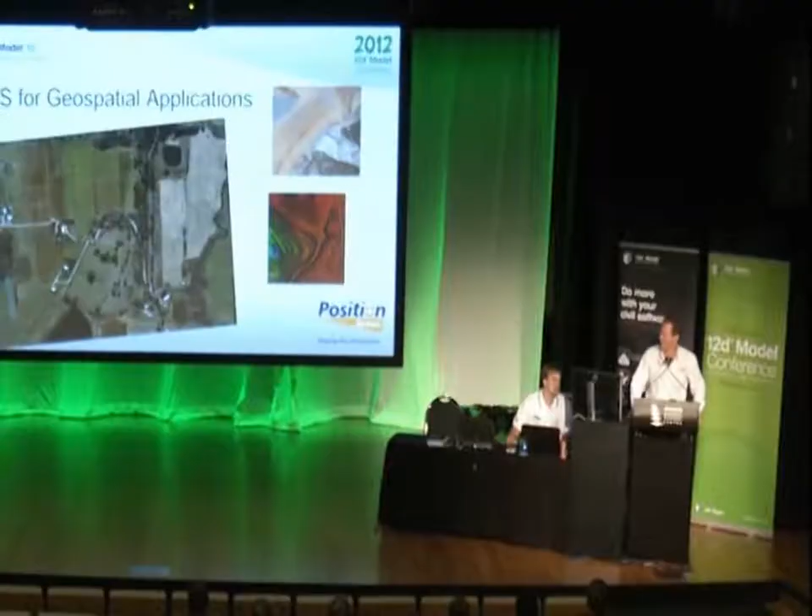Thanks very much, Lee. Great to be here today. Look, UAVs excite me, so if I get a little bit excited, please try and calm me down a little bit. But I'm a bit more excited about our guest speaker later. He sounds fantastic, so I don't think these little UAVs will be quite as exciting as that. But anyway, let's see how we go.

So UAS or UAVs, essentially they're for lots of different geospatial applications. We've got a few pictures up there of different applications. So in farming, we also use them in mining or in quarries, and they can also be used in some civil type areas.

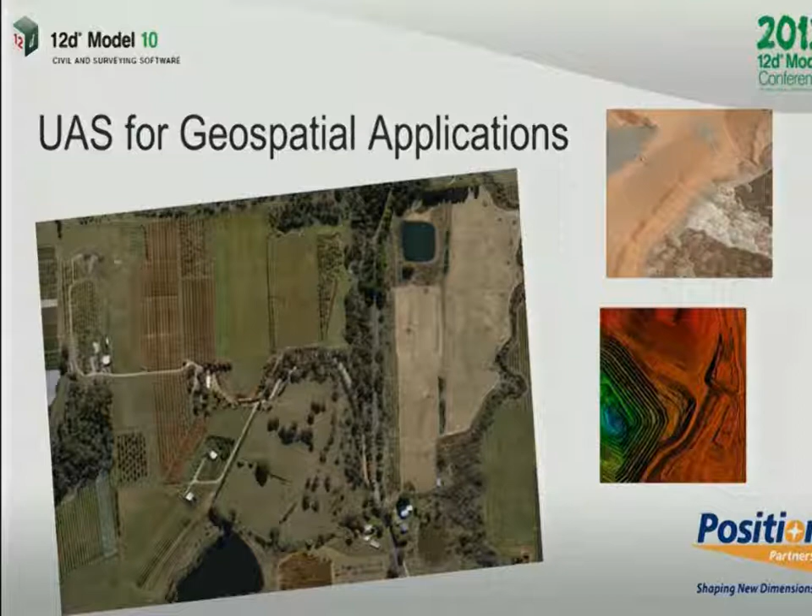So a little bit about the session. About Position Partners, about UASs, a little description on what they actually are. Also the market drivers, why are we starting to use these? Geospatial applications. I showed a few photos there, but I'll go into a little bit more depth. The value, why would you use it? And also a couple of case studies on where we've actually used these.

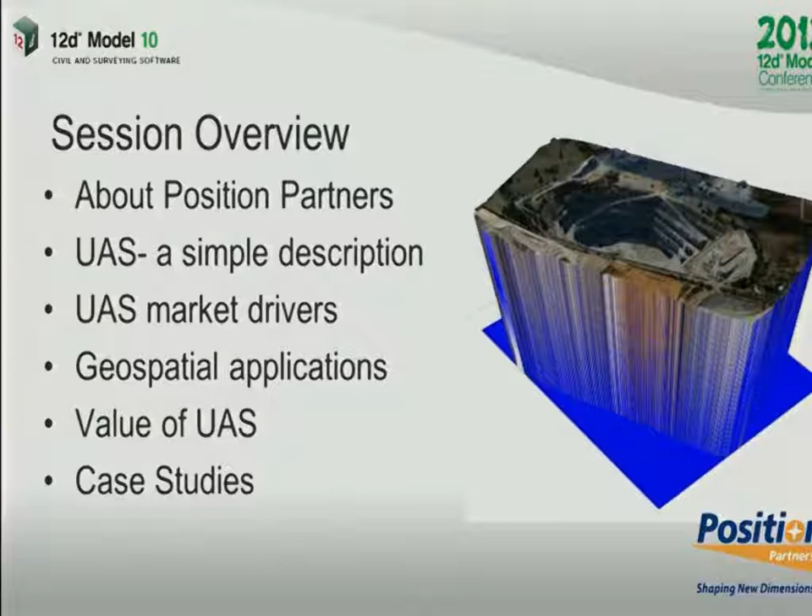So a little bit about Position Partners. Who are we? Well, we like to consider ourselves as Australia's premier provider of positioning and machine control solutions for land management, civil works, and building activities. In 2008, Position Partners was established. It was a result of our customers asking for national support and national service. So we're a bunch of individual companies which actually came together.

So now we're a nationally structured team. We have technical sales representatives, we have people on the executive side, and we also have support and administration people. The idea is for us to be a national company, but also to support on a local level.

With this joining together into one large company, we looked at other ways in which we could grow our business. And all businesses, if we don't grow them, we go backwards. So the idea was to bring on some new initiatives. And one of the ones we saw was these UASs or UAVs. We realised that this is something that Australia needs to capture. So we took it on.

We employed someone who actually has a pilot's degree. He has his licence, and he has been working with us and looking at all the different options that are out there. So throughout the time that we've taken them on, we've seen lots of changes.

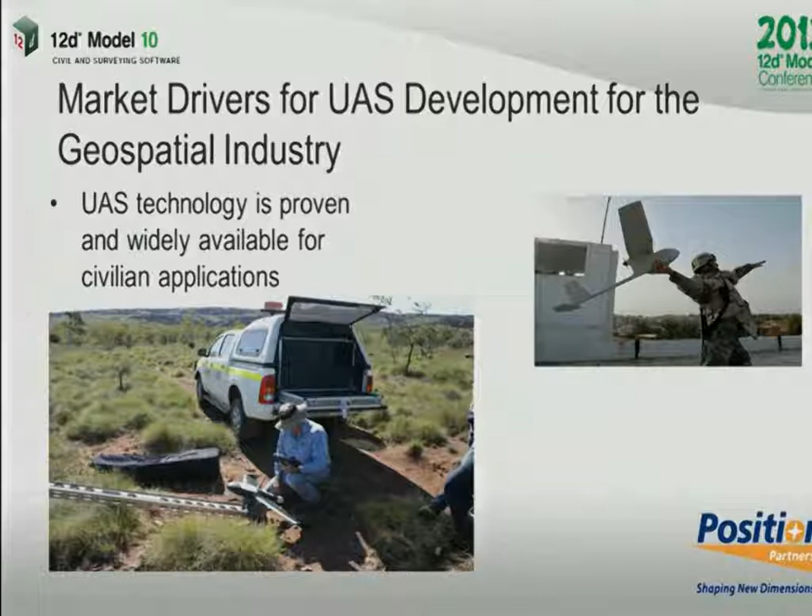Now, this technology has been proven in the military, so the military has said, okay, this is good, and we now are starting to use it in civilian applications. You'll see a couple of little pictures there of someone utilising a UAV for civilian use and someone using it in the military. And they're both very, very different UASs.

Another thing that's changing in Australia is the regulations that CASA have. There were very restrictive regulations a few years ago. At the moment, they're spending time rewriting these regulations so that there is airspace up there for us to be able to use these for our aerial surveys.

Now, there's been a proliferation of these units. There's lots of different types, and they work differently. And it's like a hammer. There's a different tool or a different hammer for every job. You don't use a sledgehammer to hammer a nail in.

So when you look at the different UASs, you can look across the market. You can say, okay, well, there's one that's great for that small job, for that quarry that's close to the houses, or there's one that's fantastic for that large mine site out in the middle of nowhere.

Also, it might be a windy day. What do we use on a windy day? That small unit we have gets blown about and our results are no good. So you really need a couple of different units to be able to cover the spectrum of the jobs that are happening out there in the marketplace.

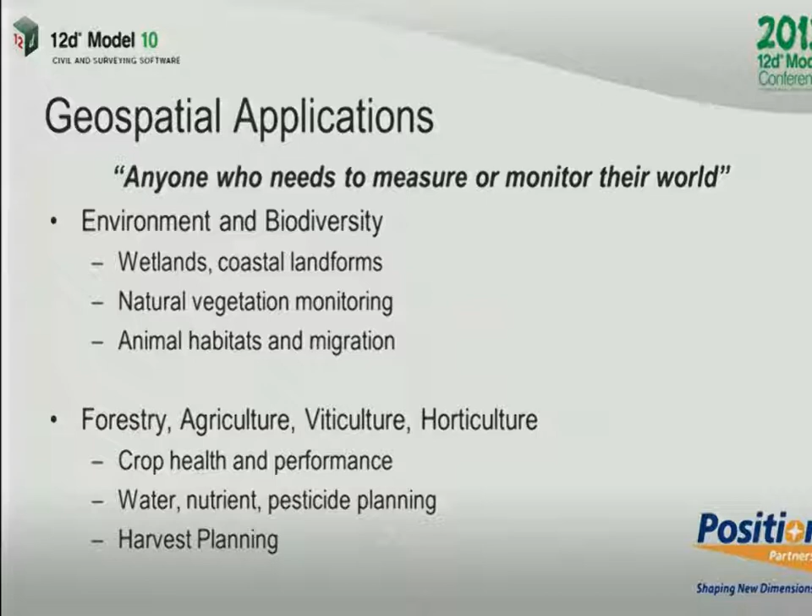Your emergency services, your natural disaster response, your accident, your incident, your crime scenes, fire monitoring, defence and customs, and being able to target certain areas, doing terrain intelligence and surveillance. And research, things like archaeology, heritage and geology.

So why use this type of technology? Well, it's more affordable than normal manned surveys. Those manned surveys, those planes cost a lot of money to put up. One of the other things that I haven't mentioned here is on a cloudy day, those high surveys, you generally can't fly them. But because you fly below the clouds most of the time, these actually work.

On site, having this equipment in your toolkit means that you can actually deploy them when you want to. So you can get information at different stages throughout the job instead of waiting for the right day and having a flyover. It's much more cost effective.

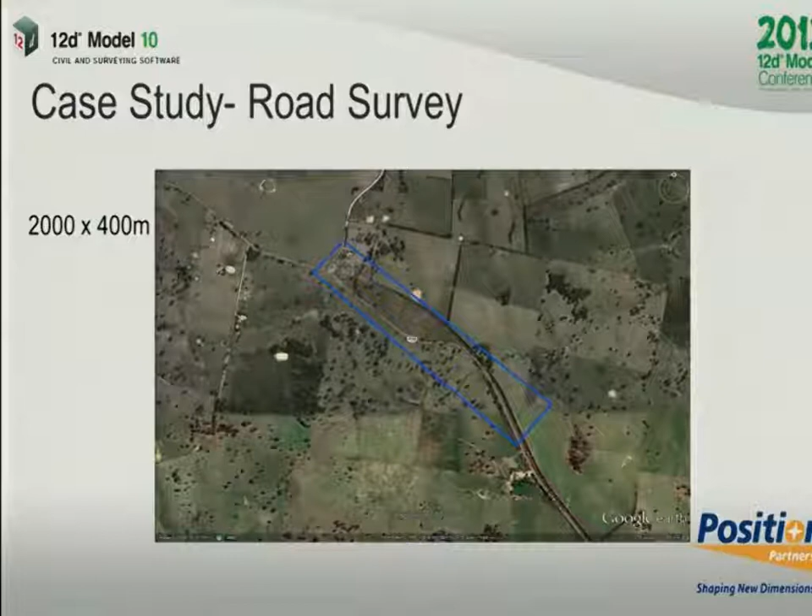So just a couple of case studies. So a couple of times we've used these units in real-time jobs, and this was actually a road that was in New South Wales. So the area that we wanted to fly over was 2 kilometres by 400 metres. There was control, so there were 6 control points within this area, and it was a road reserve.

The day had some broken cloud. There were 25 kilometre-an-hour winds, and we actually took 495 photos, and it took us 30 minutes to fly it. So the time up there wasn't a lot.

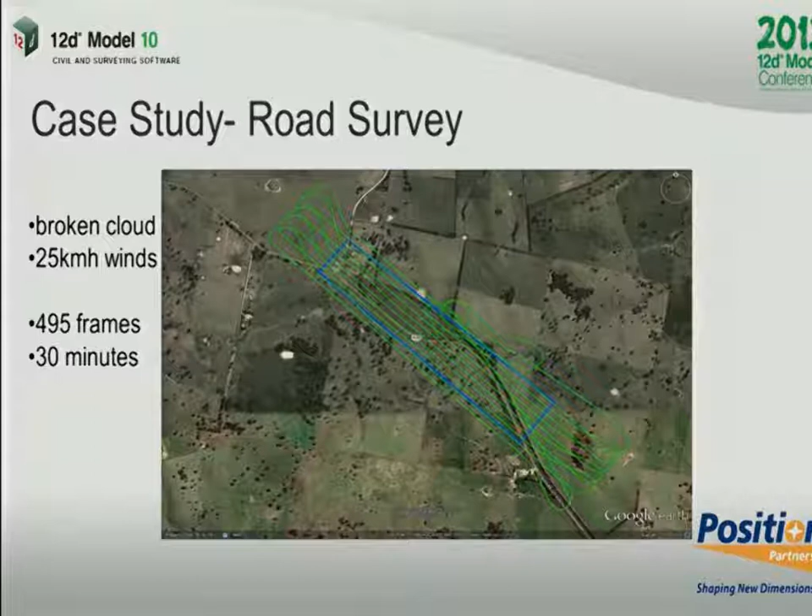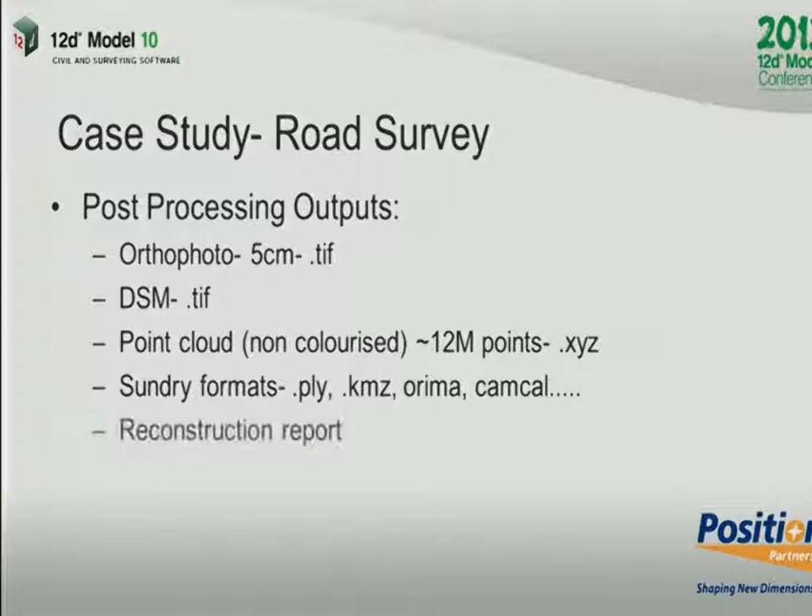So from this, we actually got a whole heap of photos, ortho photos, at 5 centimetres. We also got DSM. We also got point cloud, which was non-colorised, of 12 million points. And we also had a whole other heap of formats that we got out of this particular processing. And we also got a reconstruction report, which I'll show you.

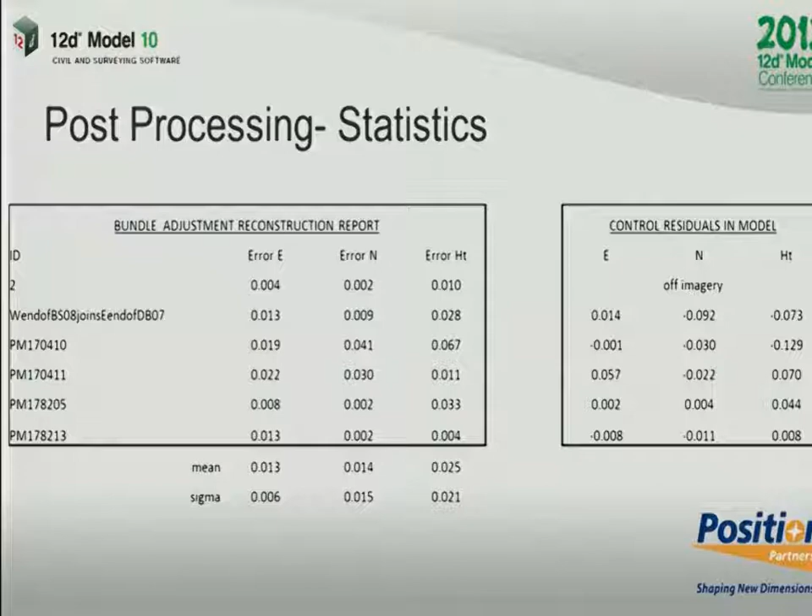So on the reconstruction report, we ended up with our bundle adjustment here, and you can see there's a number of different errors. So errors in your easting, your northing, and your height. So when we put them all together and we work out our mean, you'll see that there wasn't a lot of difference. Also, when we actually go and overlay our imagery, you'll see here, these are our differences.

Now, one of our control points, of which we had 6, was actually outside the road reserve. So it was outside of the image that we actually picked up. So that's why you won't see any residuals there.

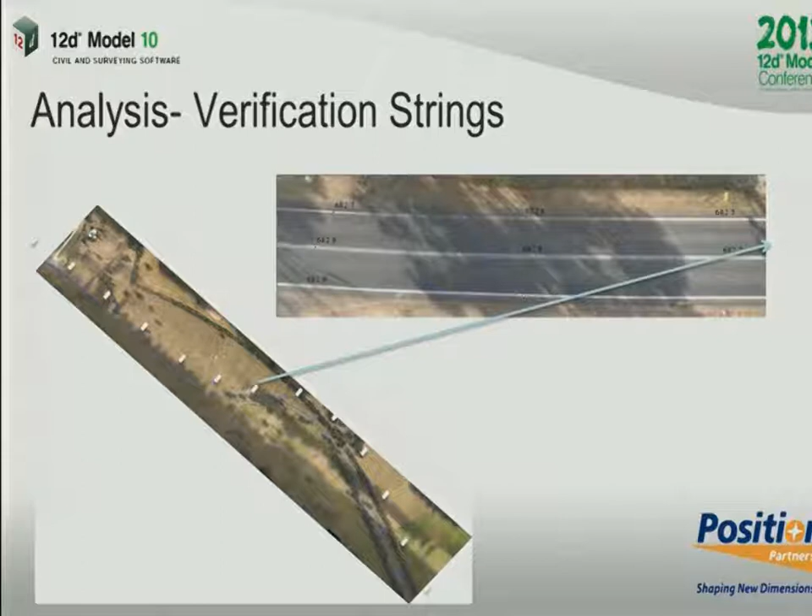So when we then go and analyse our strings that we had across the road, this road reserve had actually already been surveyed, and so we're just having a look at the difference between the survey we'd done conventionally and a survey that was done aerially. So we actually had 13 strings across the road. And if you have a look at those 13 strings, there was an average difference of 0.047 of a metre.

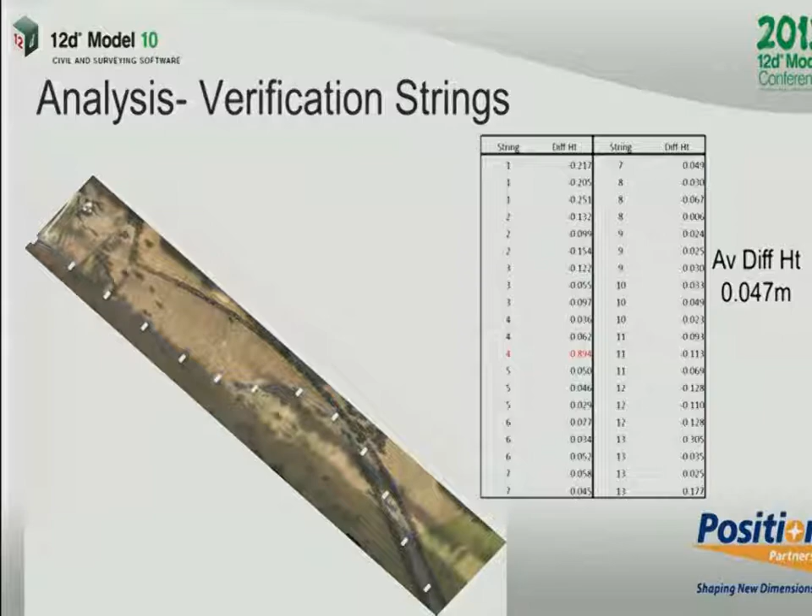Now, if we actually drill down into the data and have a look, the 4th string was pretty bad accuracy. So we can't just look at that and say, hey, why is it so bad? We drill down, we have a look and say, okay, well, the reason it's bad is if we look closely at it, there was actually a tree overhanging it. And when the tree was overhanging it, it was obviously picking that up.

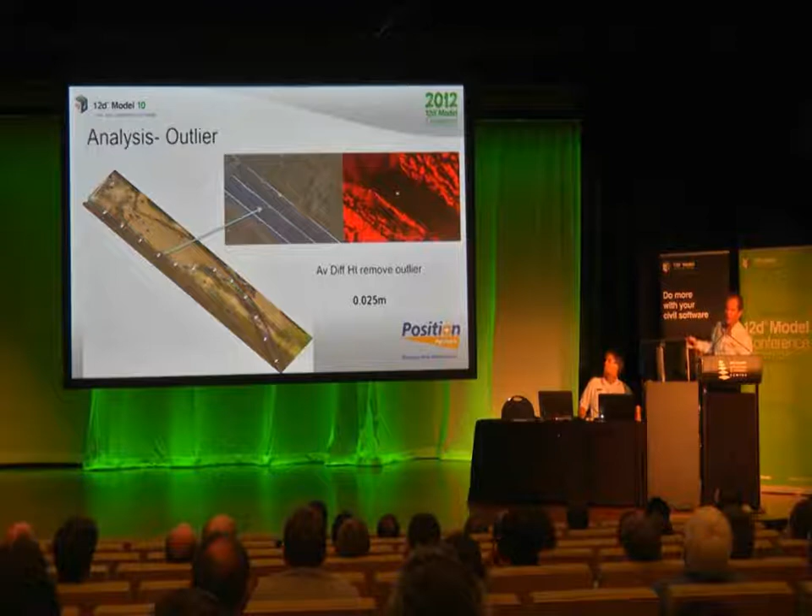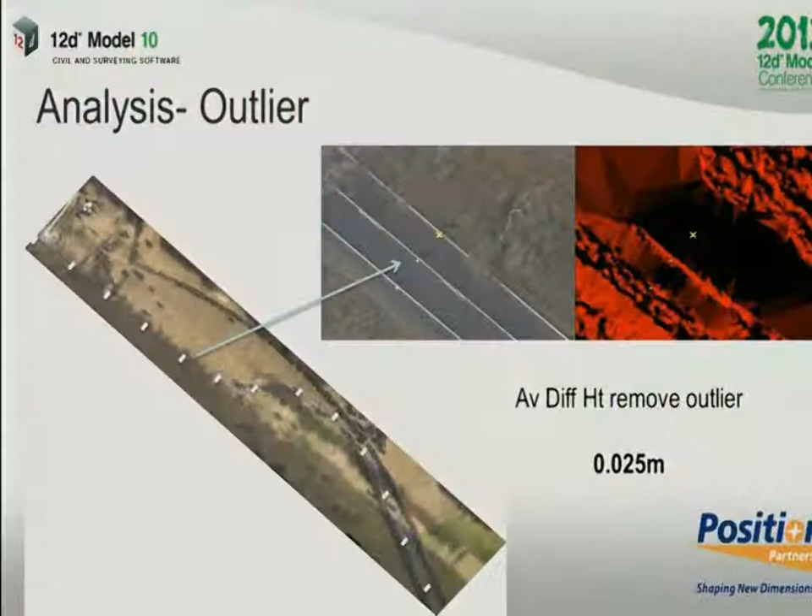So there was 800 mil there of error. And then we could ascertain that that was the issue. So once we then removed that as being an issue, we got it down to 0.025 of a metre. So nice tight accuracy for a quick flyover.

So people say, okay, well, it's half an hour in flyover. What were the other times? So your project planning in the office was half an hour. We're looking at establishing and marking our control of an hour. Our pre-flight was half an hour. Our flight was half an hour.

Our post-flight was 25 minutes. Our post-processing that was manned was 25 minutes. Our post-processing that was just done purely by the machine, where we weren't there anymore, it was just crunching away, was 4 hours. So there was a total of 7 hours, but of that there were only 3 person hours involved in this. So quite quick for the type of result that we got.

So just a little summary for the road survey. Look, it is less accurate than RTK or a total station, but it's a low-cost, rapid way of picking up your data and processing it. And as you can see there, when we actually removed our outliers, we were able to get the difference down to be quite tight.

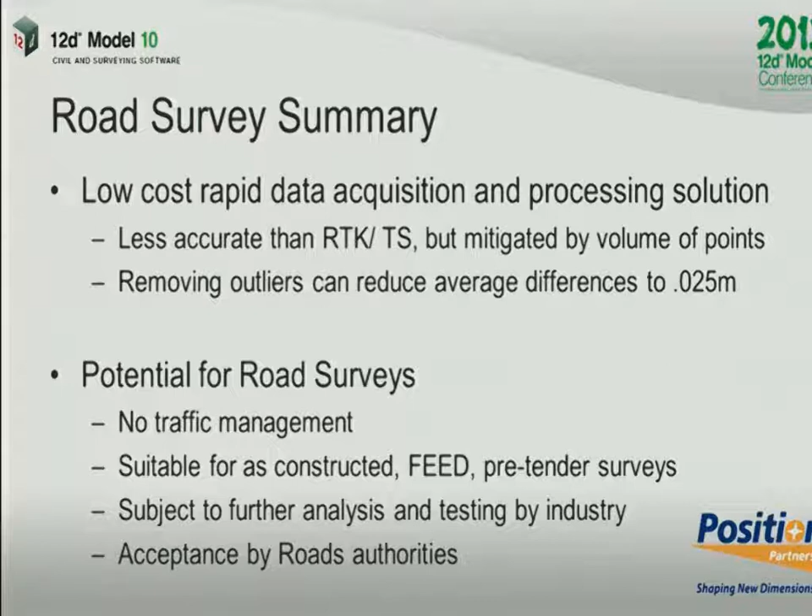So what are the potentials? I guess in areas where you can't manage the traffic, it's a nice, useful way of doing a pickup. It's suitable for as-constructed and pre-tender surveys, and also subject to further analysis and testing by the industry. I guess we need to see whether there's full acceptance there by the roads authorities. But this is one job that we did just to show what we could get out of it.

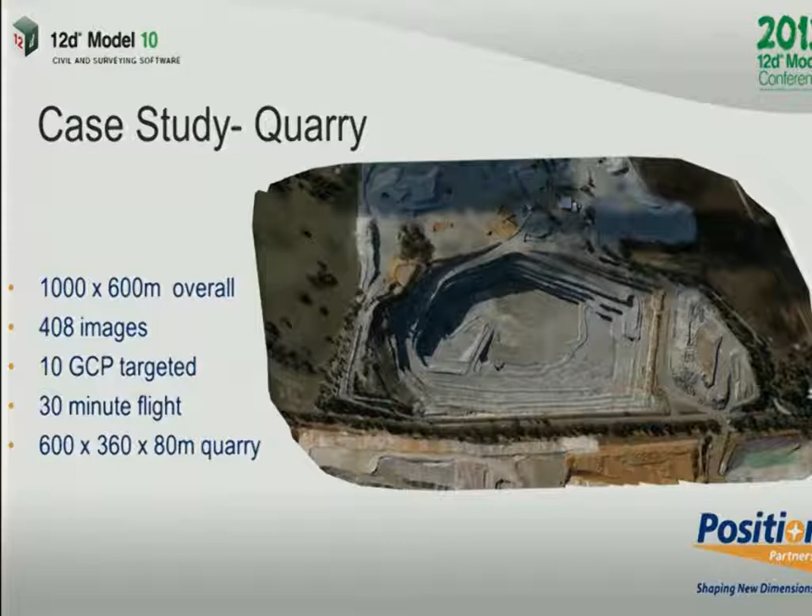Now you might say that's a lot, and we certainly don't need that many. But the reason we had 10 was because we were actually going to compare it to some scan data that we had on that particular site. So it was a 30-minute flight, and as I said, the site itself was slightly smaller than the area we flew.

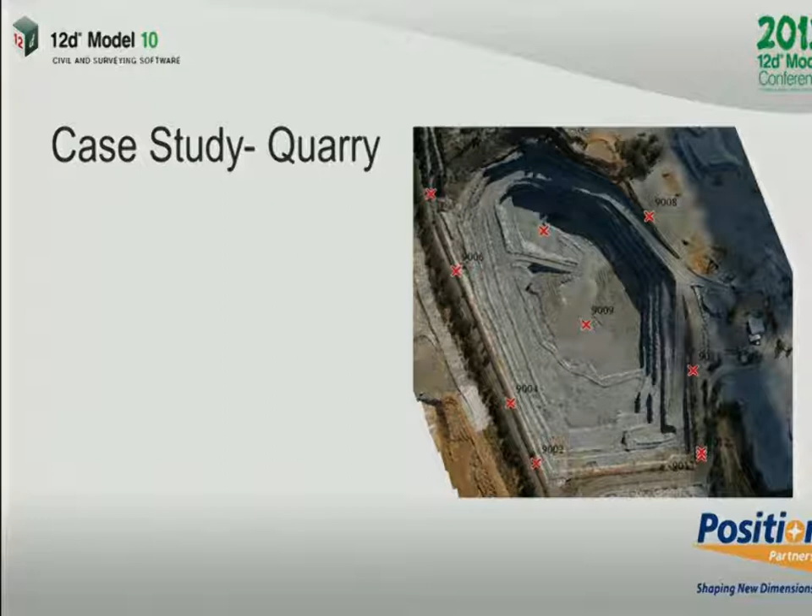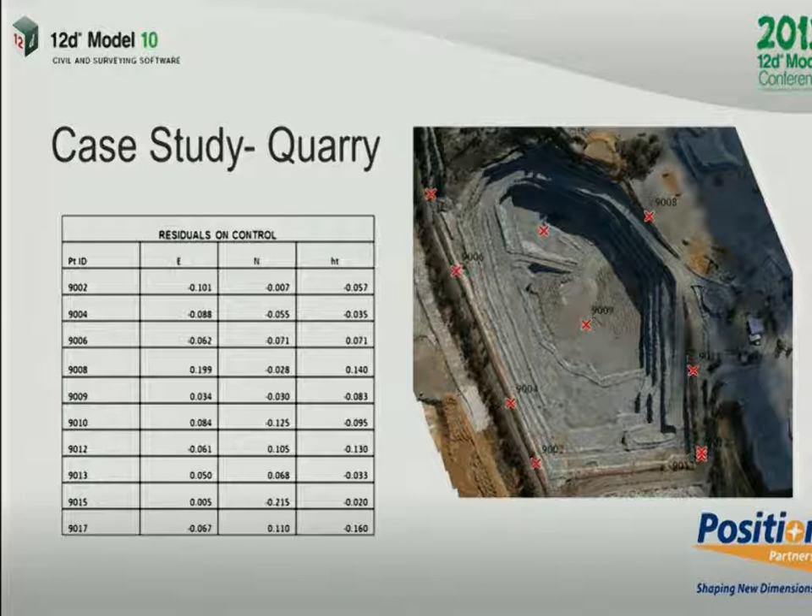So here's the control points that we had around. There's actually two here really close together. We actually threw one of those points out because it was quite inaccurate. So if you have a look at the residuals on the control, you'll see that we're pretty close with the imagery across all of these.

So what's right? Is the laser scan right? Is that right? Well, the laser scan's probably closer, but for the amount of volume that you get in a very short time, this is a really, really good way of doing it.

So this job, it took 1 hour in planning, 1.5 hours to get the control and targeting set up. Pre-flight was half an hour. The flight was, sorry, half an hour. Post-flight was 1.5 hours. 6 hours of processing, unmanned, and 2.5 hours to do your quality checks and volume calculations.